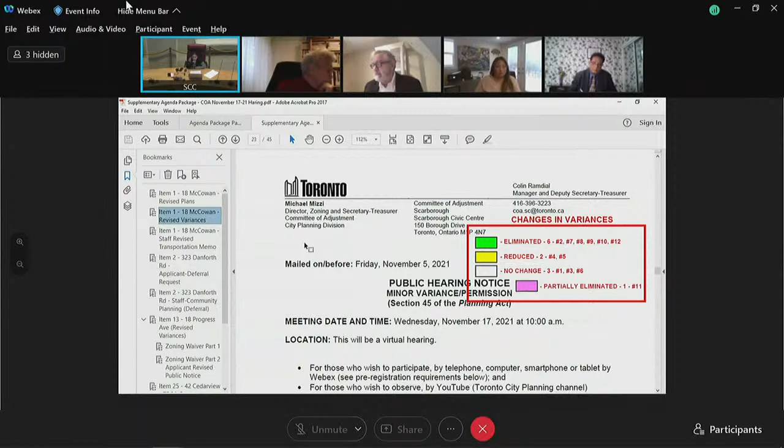Okay, so the revised notice, which shows the changes or elimination or modifications to the variances. So variance number 1 remains the same, no changes being proposed. For variance number 2, the setback from the front lot line abutting McCowan, that particular variance is being eliminated.

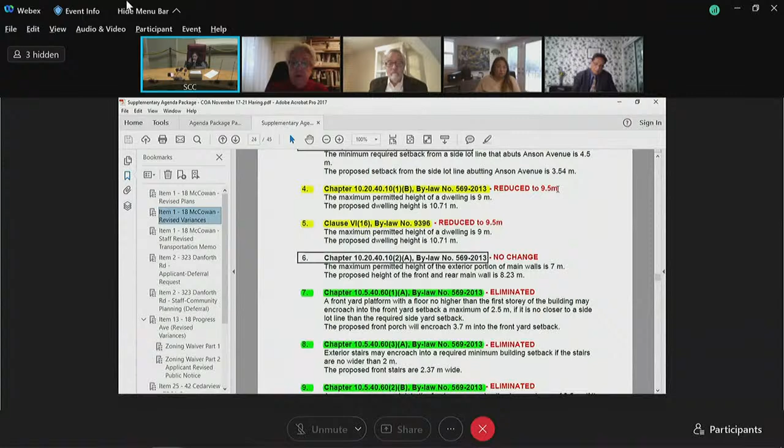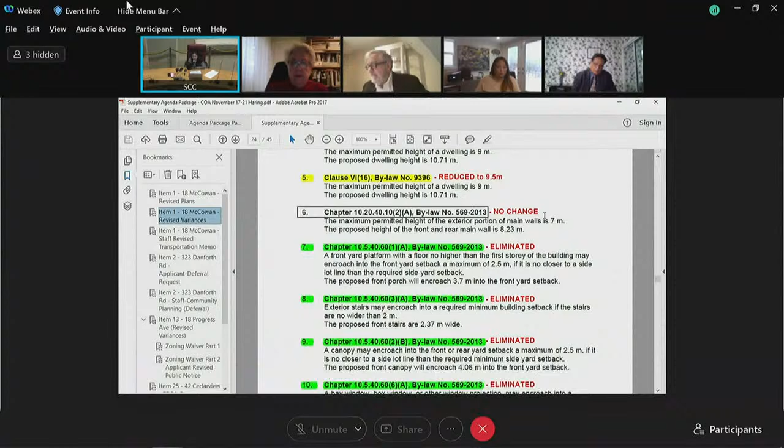Variance number 3 stays as is, no change. Variance number 4, the building height is being revised to 9.5 meters. Variance number 5, again, similar, because of the other bylaw, the height of the building is being revised to 9.5. Item 6 remains the same, no change.

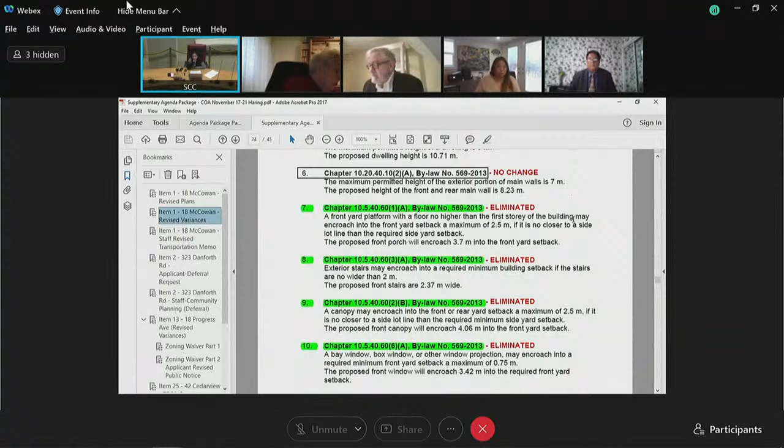Item number 7 is the front yard platform variance that is being eliminated. Variance number 8 for the building setback for the stairs that is being eliminated. Variance number 9 is being eliminated, that dealt with the canopy encroaching into the front or rear yard. That's eliminated. Variance number 10 is being eliminated, also had to do with the bay window box or other window projection encroachment.

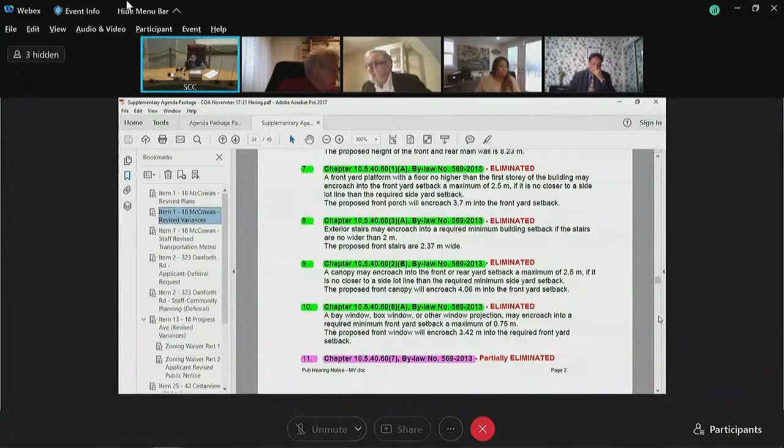And number 11 is partially eliminated, and the way I read it is that the eaves of a roof may encroach into a required minimum building setback, a maximum of 0.9 meters if they're no closer to a lot line than 0.3 meters. The proposed north eaves encroach 0.96 meters. That has not been changed, but the portion has been eliminated, which where it said the proposed east eaves encroach 3.23 meters. Variance number 12, as you can see on the screen, has been completely eliminated.

So that sort of gives a recap of all the variance, the modifications on the notice. Now, Member M, please go ahead.

Thank you, Madam Chair. So I'd like to thank the applicant for making these substantial changes, because to be honest with you, when I had read a lot of the presentation materials from the Cliffcrest community, I kind of agreed with some of their concerns in terms of the appropriate placement of the building and the overall scale and size of it. So through the elimination of the 6 variances, it definitely scales back the development.

It also allowed us the relocation of the driveway to be much further away from the intersection, which was what I understand transportation's main concern. What I also do like is that the building now is aligned with the adjacent building on McCowan Road. And so it is a very similar front yard setback to McCowan Road and maintains that consistency of the streetscape. So I do see that they have made a substantial effort to address the concerns while still being able to achieve their desires for a new home.

Katrien, may I request you to please bring up, if possible, the site plan that was revised and sent? So it's in the supplementary agenda, Member McCauley, the first tab on the supplementary agenda, the revised plan. It's up on the screen for your consideration.

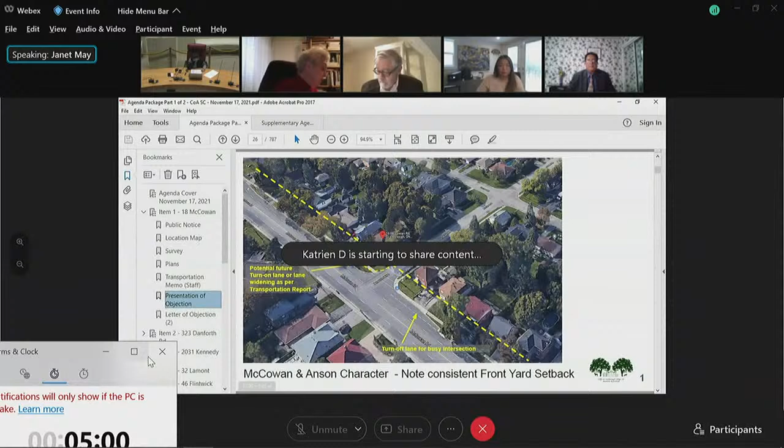My name is Janet May, and I am a director of the Cliffcrest Scarborough Village Southwest Residents Association and co-chair of the Planning and Development Committee. CSV SWRA is an incorporated not-for-profit association working to preserve the unique nature of our neighborhoods. We do not support the application to replace the modest dwelling located at 18 McCowan Road with a significantly larger house not in keeping with the character of the neighborhood.

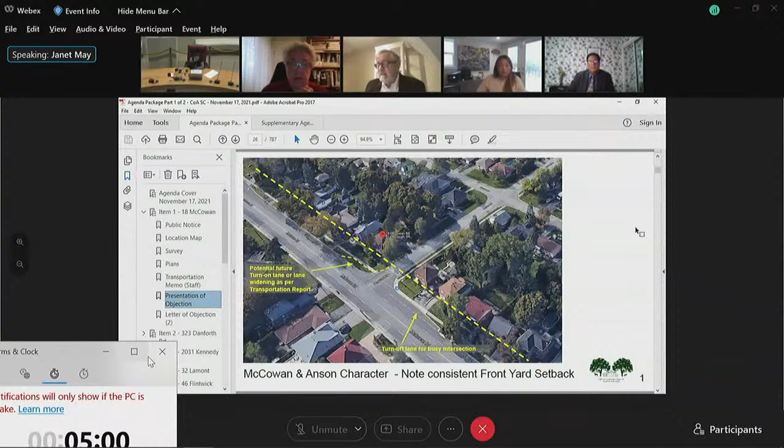I live on Harewood Avenue, a few blocks away from this proposed development. This presentation was submitted to the Committee of Adjustment in time for the deadline of November 9th, and the slides are in response to the original application. On November the 15th, the applicant submitted revisions to the application, and we were not permitted to revise our presentation, so we are working with an old one.

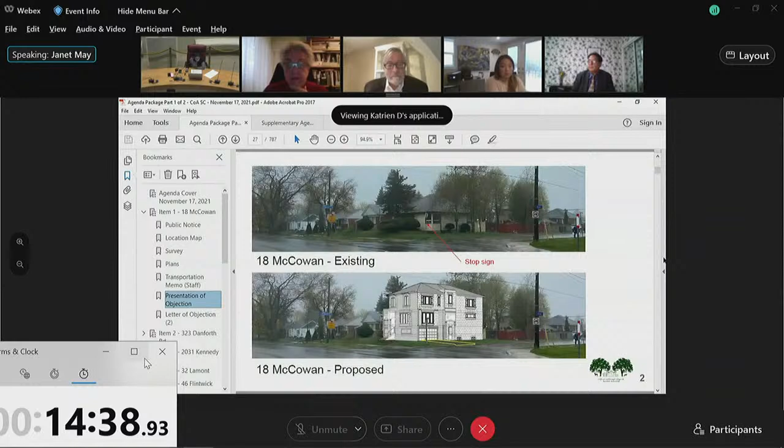Slide 2, please. The image you see here remains materially accurate except for the positioning on the site. In reviewing the revised application, no significant changes have been made to the oversized and inappropriate mass and scale of the building. We observe that the building has been moved back to the proper setback from McCowan Road, and the peaked roof has been cropped.

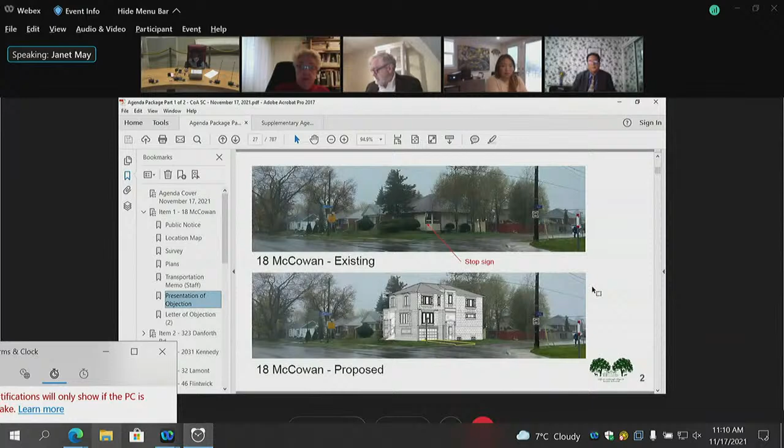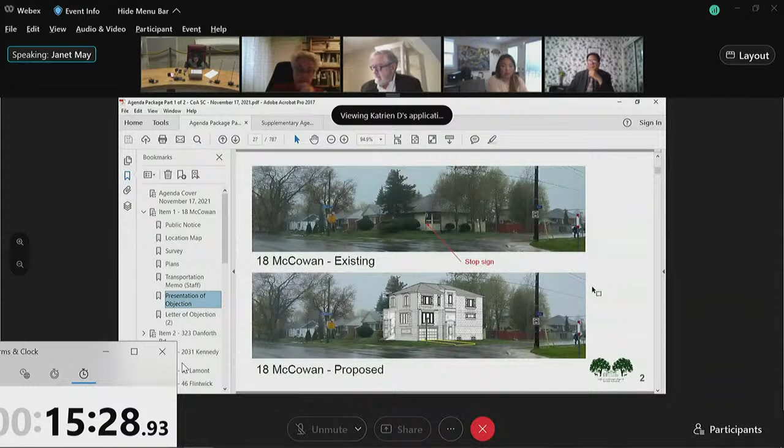But the most egregious variances remain, including the 25% increase in floor area and the additional 1.23 meters in wall height. Minor variances must maintain the intent and purpose of the official plan, whose policies ensure that new development in a neighborhood respects the existing physical character of that neighborhood. The existing physical characteristic of this neighborhood is 1-story and 1.5-story houses or victory homes, not the examples cited by the applicant in her presentation. The excessively large houses are not supported by the majority of people who live in the more modest-sized homes, and approval of this application will increase the slippery slope towards overdevelopment of our lots.

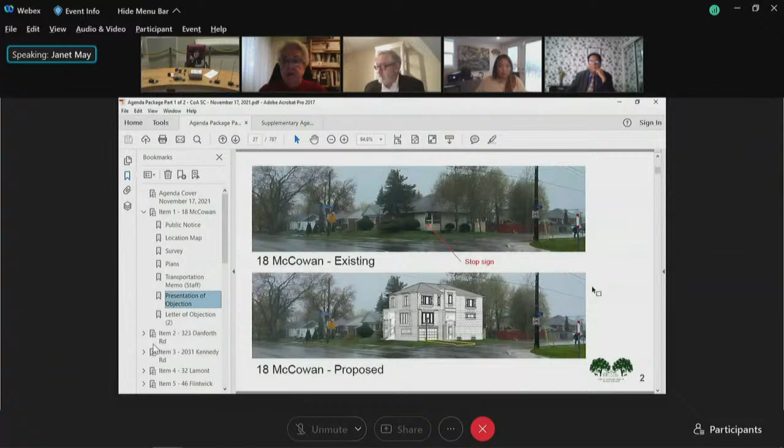Slide 3, please. The proposed development that will replace the traditional bungalow is described as a 2-story house, but has the appearance of a 3-story. See the floor plan for the living area above the garage. According to Chapter 10 of Bylaw 569-2013, the building may have no more than 2 stories. This application, therefore, does not maintain the general intent and purpose of the zoning bylaw.

As a local resident, I am still concerned about the proximity of the driveway to the intersection. It is still very close to that stop sign, and I believe that the house should be redesigned to move the garage to the west part of the house, away from the east part and the stop sign. I think that pedestrian safety needs to be considered. This intersection is a gateway to this section of Cliffcrest.

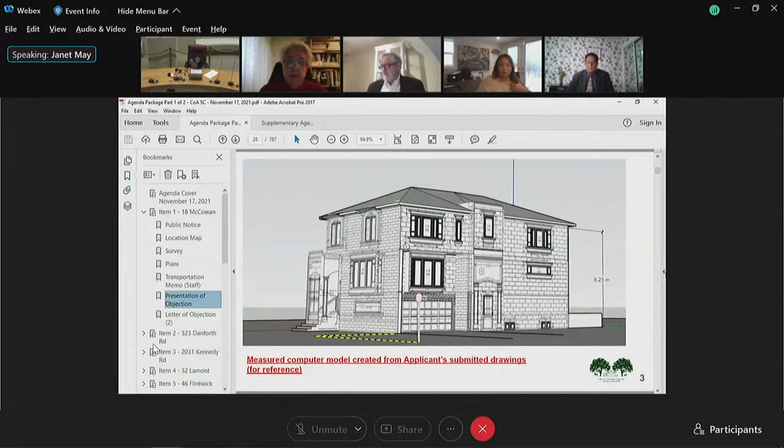Approval of the requested variances will result in a new dwelling that is significantly larger and not in character with the existing homes. The requested variances are not minor in nature and will have a negative impact on the people who live in the existing homes around 18 McCowan Road. Because of this, the development is not desirable for the appropriate development of the land. The 4 tests set out in Section 45(1) of the Planning Act are not satisfied. Therefore, we request that the Committee of Adjustment refuse the requested variances.

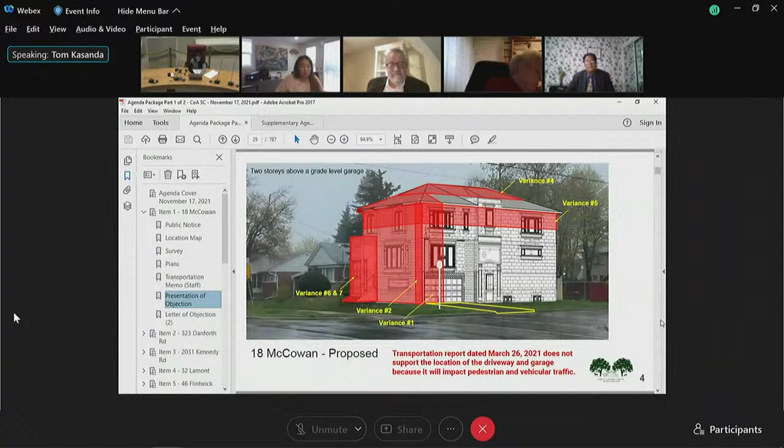The diagram you see above was prepared to show the setback variance, but the reality is the red still materially represents the impact of the remaining request for variances. In fact, the red in this diagram is understated. The red area to the left originally represented the front setback, but if you doubled that volume of red, it would also represent the 25% increase in the size of the proposed massing of the building due to the floor space index variance request. The horizontal band under the eave represents the impact of the wall height variance, which also has not changed. It is clear that the remaining variances are still not minor.

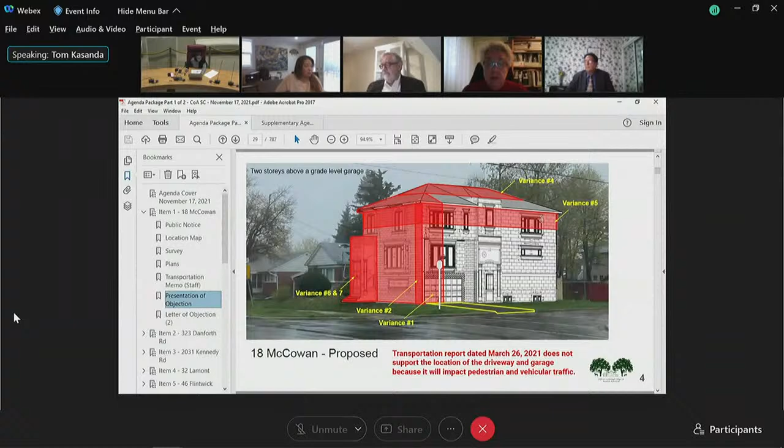Slide 5, please. Although the front yard setback and other 4 variances, all associated with the unimaginable positioning of this home, have been removed, this slide shows what was originally applied for.

I cannot speculate as to whether the applicant seriously wanted to move the house this close to the road, or if this variance was planned to be disregarded to create the appearance of compromise with the neighbors. But regardless, this is irrelevant. Compromise is not part of the 4 tests.

If the applicant had proposed 40 variances and eliminated all but 1, we understand the committee's responsibility is to evaluate whether that 1 remaining variance meets the 4 tests. In the revised application, the remaining variances do not. Let's take a closer look.

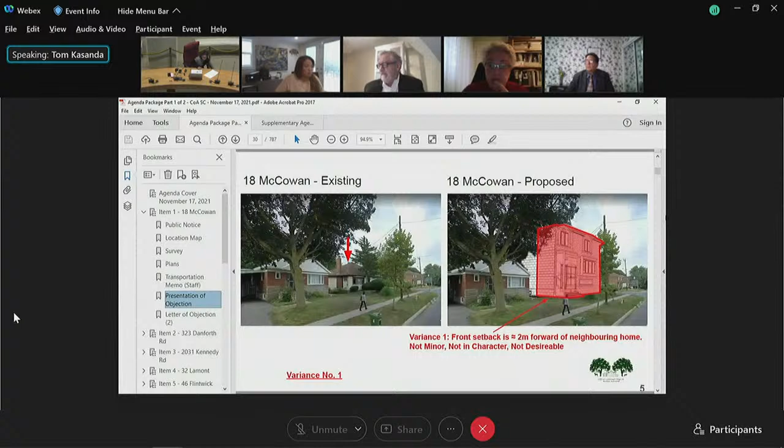Can we skip to slide 7, the floor plan? With respect to the FSI, this home is 25% larger than permitted for its lot size. That red area is on every floor. It is not possible to consider this variance minor.

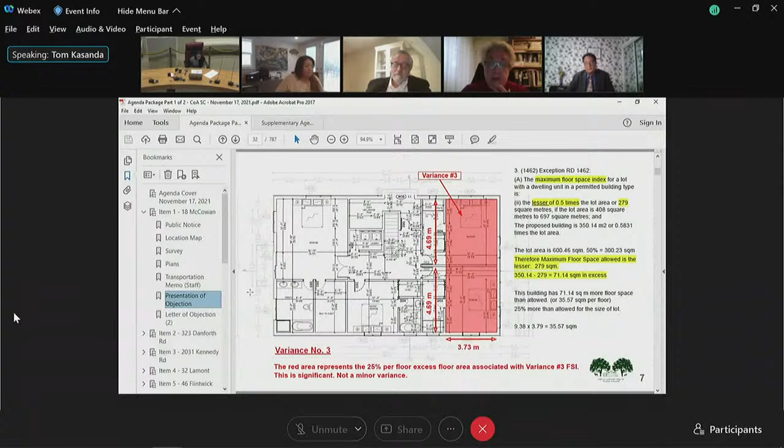This one slide disqualifies the application for approval, but there is more. Slide 8, please. Because of the last minute change by the applicant, we're not allowed to present a revised diagram. However, one was submitted to the COA. You'll have to imagine that a bit of the peak roof has been removed, but the 1.23 meter wall height variance and 1 meter side setback variance remain the same.

There is a lot of red, and proportionally, you can see it's not minor. The applicant may claim that the height is only a 0.5 meter increase, but in actuality, the impact of that variance on the mass of the house is much greater due to a clever loophole.

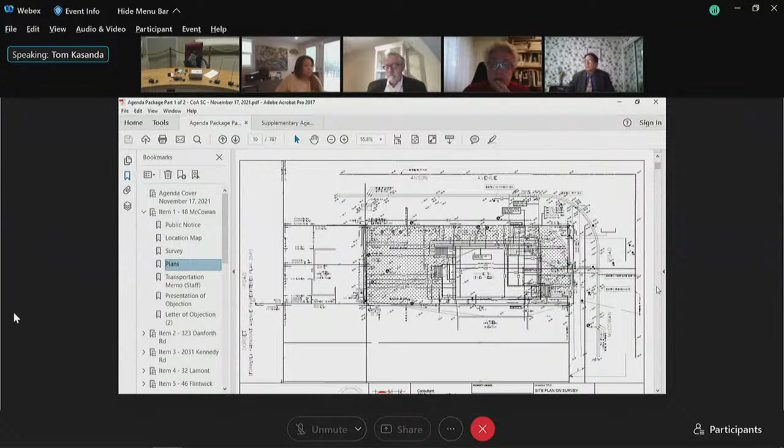Can we go to page 9 of the submitted plans, the roof plan? This roof is not considered a flat roof because less than 50% of the roof is flat. But this only exists with the inclusion of the requested height variance.

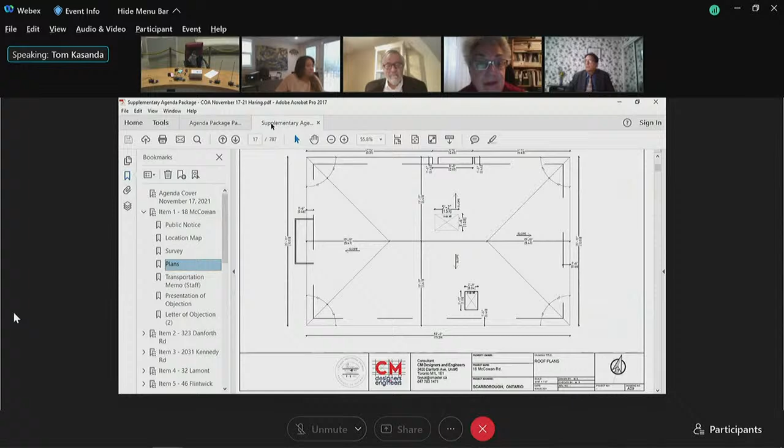Slide 9, the roof. And what you'll see if you just scroll down, that's the roof plan. This is the wrong plan. This is the original plan, unfortunately. So let's just carry on and go to, this is the wrong set of plans. That's the original set of plans that doesn't show the flat roof. Oh, no, it's not the resubmitted plans.

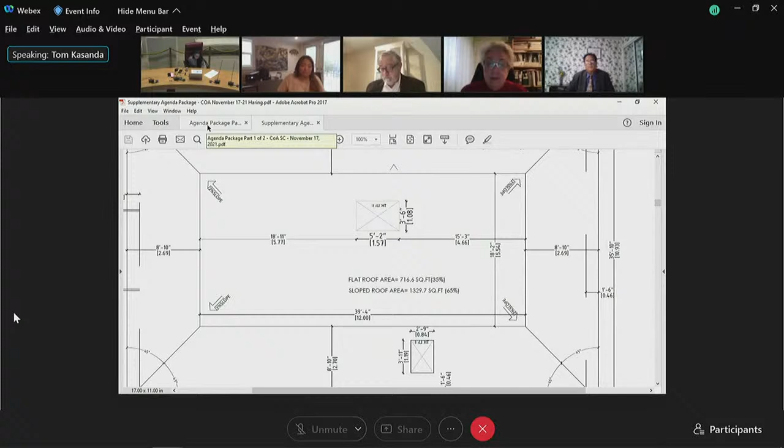In any case, let's return to slide 8 of the community presentation. So without the 0.5 meter height variance, the roof would be categorized as a flat roof. Flat roofs are restricted to 7.2 meters in height because they are more massive by nature. The application attempts to get around this bylaw and add 2 additional meters in height to a flat roof design.

Because in fact, this is a mansard roof where they've added a peak to show a very high variance and then drop it down. But everything above the flat roof height dotted line shown here is the implication of the requested height variance, creating a building that is not in character with the neighborhood and not desirable for this particular corner lot.

It does not meet the 4 tests, and we ask the committee to protect the neighborhood from this overdevelopment of this site and refuse the application.

And it's very important to understand how this small variance actually, everything you see there in green, that's the build envelope of the bylaw. Everything outside that green area is the impact of the current variances. And again, you can see it's not just a few inches or a foot. There's an incredible amount of extra volume created by these variances.

And as Member M said, the original proposal was a concern in relation to its size. And that size has not changed.

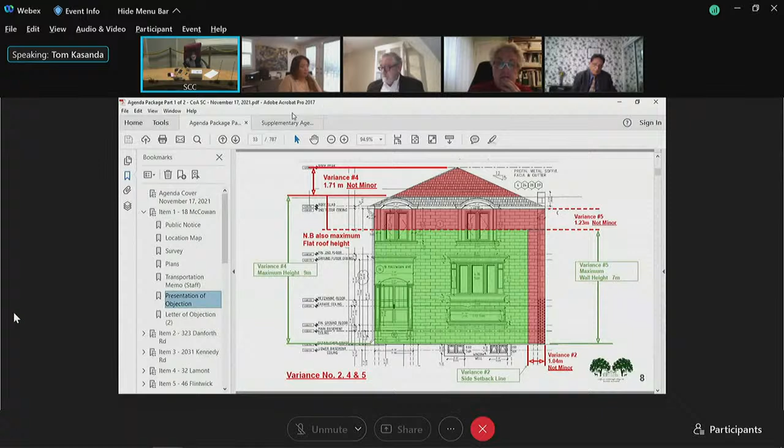Just wanted to clarify, in case there is some confusion. I did have concern with the original application, as both Tom and Janet had alluded to. But the scale is more than just the floor space. For me, I was pleased with the reduction in height. My main concern beyond the scale was the placement of the house, in terms of its effect on the streetscape, as well as the safety of the driveway placement. That being said, I don't have the same concerns as I did with the original application, so I don't want my words to get skewed.

I do feel that they have made an effort to scale back the size of this dwelling with the height reduction on its own and the elimination of 6 variances. I do appreciate that the floor space is larger than permitted by bylaw, but we've approved many floor space indexes around this amount in this area. So my concern wasn't so much with the FSI, it was with the height and the building placement, which they have addressed for me. Just wanted to clarify my words.

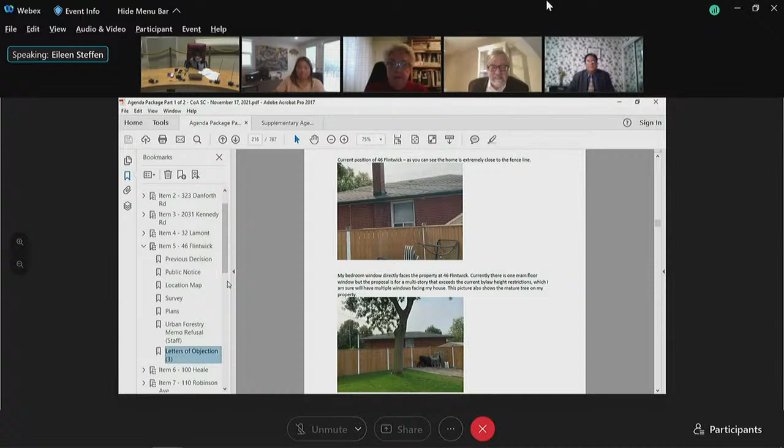Okay. So if you could refer to the pictures in front of you that I submitted, it all has to do with this irregular lot and the positioning of this house, and the fact that my aunt really feels this is fundamentally going to rob her of her sunlight and invade her privacy. Okay, no, I get it, I understand that. Sorry, my apologies, first of all.

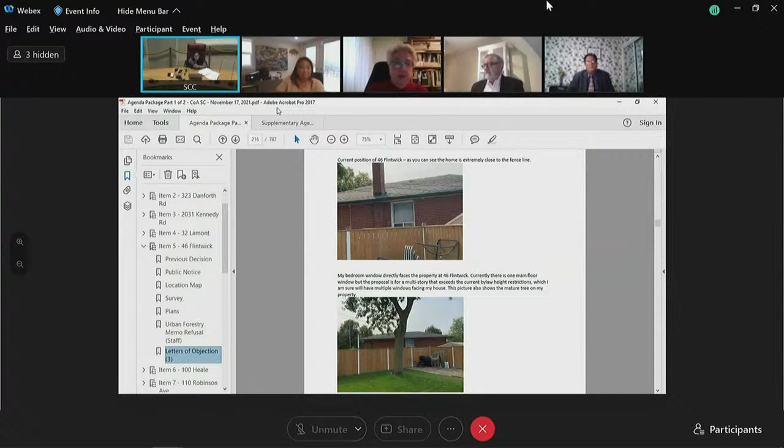I probably had a different notice put up. So for the record, I want to confirm - yes, Member McCauley, I will come to you, I've seen your hand. Just for the record, I want to say that there are three variances for this application, 46 Flintwick, and all three are related to the height. The first one being from 9 to 9.86, the second from the older bylaw going from 9 to 9.92, and the third is the height of the exterior portion, the main walls.

Just to clarify to Eileen and her niece - I'm sorry, I didn't catch your name.

So want to clarify that the positioning of the house itself meets the bylaw. There are no reductions, we understand that. So there's no, by law, as of right, the zoning bylaw permits the house to be located, the proposal meets the side yard setbacks and whatever the setbacks are required. So the zoning bylaw, as of right, permits that type of envelope or location of the building on the property.

Sorry, we totally appreciate that the current structure and the positioning of it is within the bylaws. Our objection is that if they're giving a variance, the positioning of the house needs to be taken into account, given that it is kind of kissing up to the limits of where houses are, the closeness of the property line. And while it's currently within the structure, I know they'll say an extra 3 feet above the bylaw sounds insignificant, but when you look at the pictures, imagine a second story dwelling there now where a current bungalow exists, and then to boot, one that is also exceeding bylaw by 3 feet.

Okay, thank you, Ryan. And Katrien is bringing up your presentation. For the record, we did receive a copy of this presentation in our agenda. So Ryan, you have 5 minutes and your time starts now. Great, so again, my name is Ryan Doherty.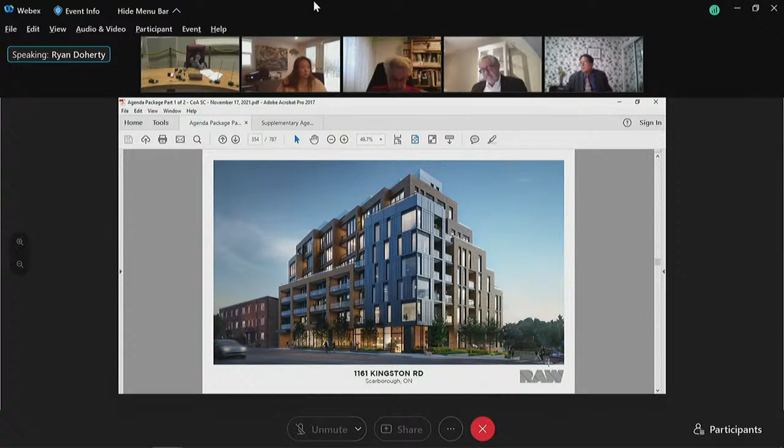I'm a planner at Bousfields, and I am the agent to the application. The proposal consists of an 8-story building containing retail and residential uses. The building will provide a 4-story street wall with new tree planting along Kingston Road and Courcelette. At 8 stories, the proposal is in keeping with the existing mid-rise context in the Birchcliff area, where buildings of up to 10 stories have recently been developed.

The proposal is also in keeping with the site's avenues and mixed-use areas designation. Those are areas in which the official plan notes that much of the city's growth is to occur. Through our ongoing site plan application, we have had several discussions with city planning over the better part of the past 2 years. The results of these discussions were many progressive iterations to the design of the building to mitigate overall built form impacts, particularly on the Kingston Road right-of-way. As a result, we now have a mostly positive report from planning and a positive report from transportation services.

I also wanted to note that we had been involved with the local community through a community consultation meeting that was held this past June with the local councillor as well.

I just wanted to touch on Urban Forestry's recommendations as well. So the issue here is primarily regarding on-site soil volumes. Soil volume is a common issue that arises on most urban infill projects, given that the requirements are very challenging to meet on small sites. We've done the best that is feasible in this location, given that our site has some unique dimensions and grading, and considering that the planting along Courcelette does not count towards our on-site soil volume.

We also have confirmation from our landscape architect that the proposed tree planting along Kingston and Courcelette will have sufficient overhead clearance and soil volume to grow. And so finally, before I hand it off to Roland, I'd also like to add that the proposal will represent a unique and eco-conscious mid-rise addition to Kingston Road and is intended to achieve a LEED Platinum certification and TGS Tier 2. Next slide, please.

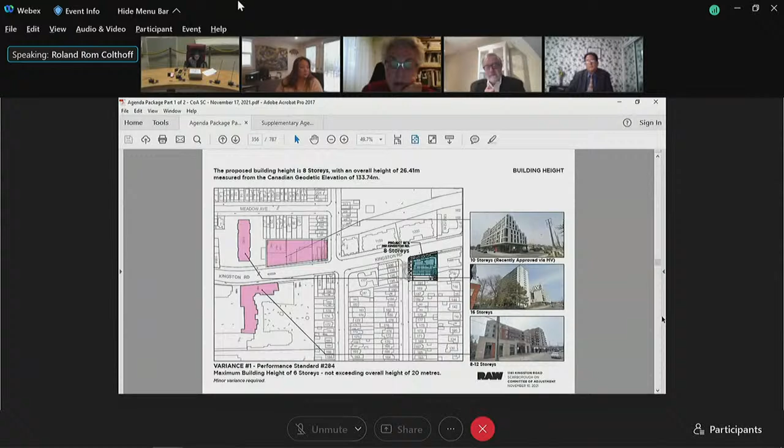A lot of the variances go to the configuration of the lot and the geometry, and the fact that it slopes one full level as you proceed to the south. This speaks to the context in which the building is happening. The densities in the area are in keeping with what we're asking for here. Similarly, the height—there's a 10-story building just down the street—the density and heights are in keeping with what's in the area.

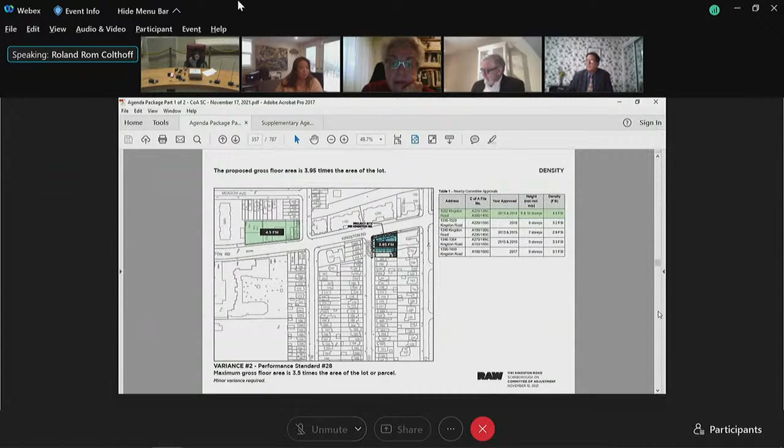With regard to the front yard setback, we are providing 4.8 meters from the curb to the building face, as called for in the typical street guidelines in the city. We have the 2.1 meter pedestrian clearway. We have a letter from our landscape architect, which we weren't able to submit to the committee in time, confirming that the canopy of the tree will be unaffected by this building and by the 2 meter setback of the floors above.

We're proposing not to have a setback on the Courcelette side because we are a mid-rise building fronting one of the major avenues within the city, so it's appropriate to have a zero lot line condition. It's worth noting that Courcelette is quite a broad boulevard and does provide adequate landscaping along the street and adequate separation and buffer from the building to the curb.

The angular plane from the rear, taken from the bylaw as a result of the slope of the site to the south by approximately 3 meters, does substantively cut into the road. It's a very small site and we're proposing a relatively modest building. It does generally comply with the mid-rise guidelines, which are citywide across the city of Toronto. You can see we're quite close to the angular plane at the rear, just some small projections. These have all been gone through with city staff to try and arrive at a solution they're comfortable with, and we understand that in terms of the rear of the building, they are in congruence with that.

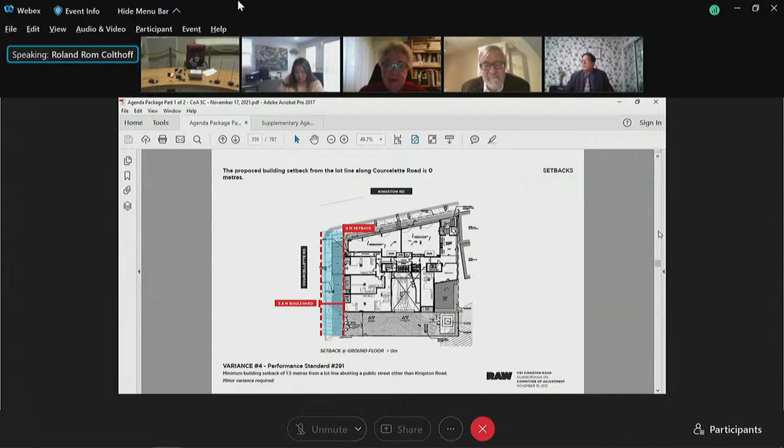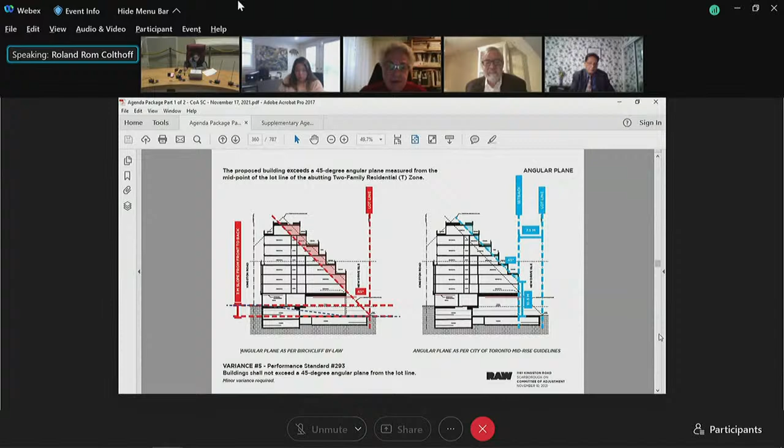If we could go back to the slide before this for a moment—back to slide number 8, please. Okay, so we set back the building above the 14 meters as required. This is the one that talks about the front yard.

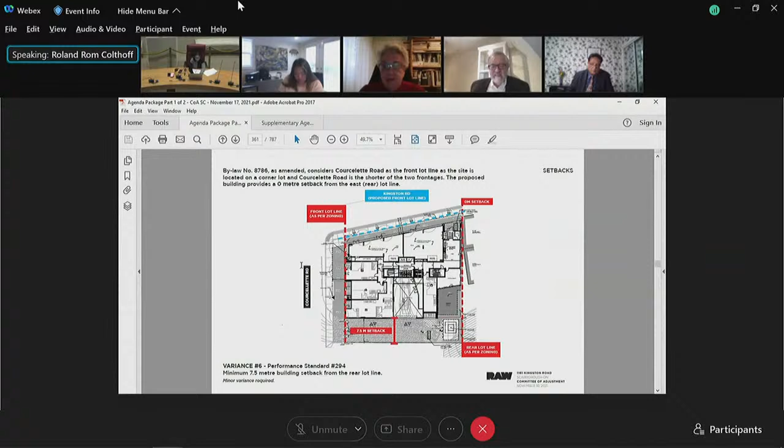Interestingly, the zoning bylaw counts Courcelette as the front of the site, which is obviously incorrect. Kingston Road is the major street front, and all the setbacks should be measured from that. So a number of these variances fall out of that simple circumstance.

The bylaw requires a setback above 14 meters to provide the appropriate character and height to the building. We are providing that setback on average because of the geometry of the site. You can see on the right-hand image that the building terrace has a sort of serrated edge in plan. On average we do meet the 1.5 meter setback, but we do have projections into it.

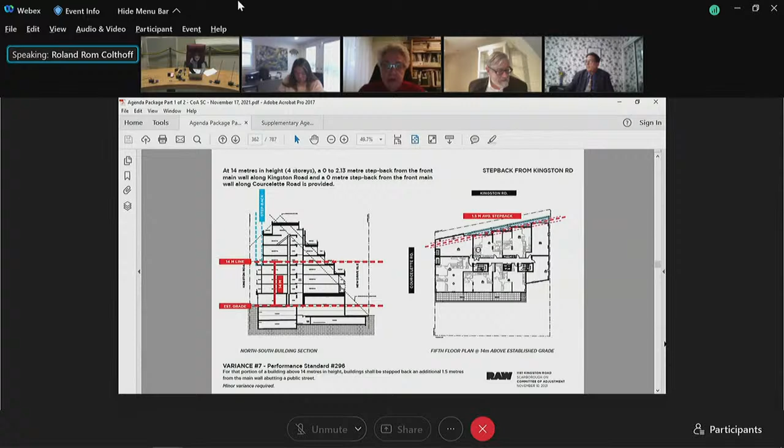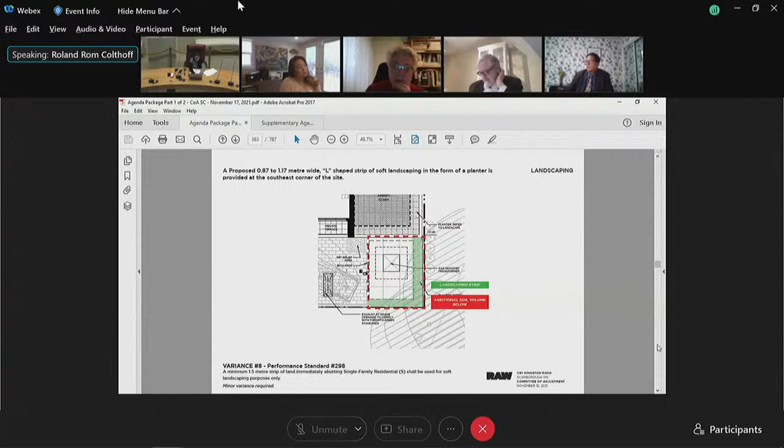This speaks to the landscaping at the south of the property. It is slightly narrower than the 1.5 or 2 meters requested by the bylaw. However, we have spoken with a landscape architect, and we will have appropriate buffering for the transformer vault in that location, a pad-mounted transformer, and for the building in that location.

We are providing the appropriate amount of outdoor amenity space and green space in the building. We have an area at grade and on the upper floor of the building for use and enjoyment of the residents of the building.

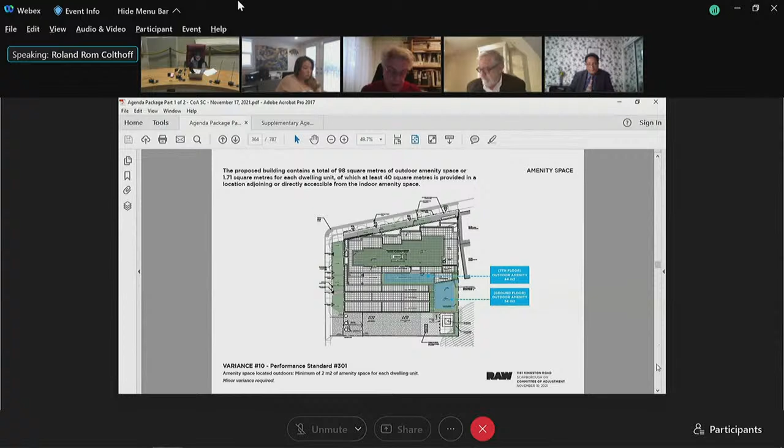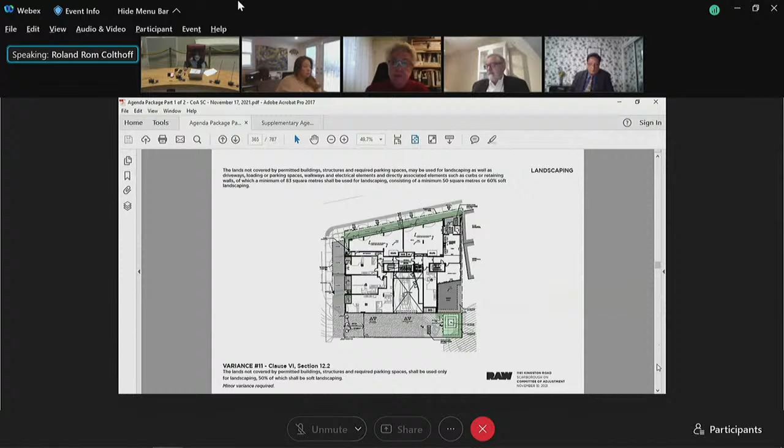We are providing the appropriate amount of soft landscape cover we feel on the design. We have soft landscaping along Kingston Road, and mature street trees can grow in that. I also mentioned the area at the southeast corner by the transformer before. Next slide.

Because of the slope of the site, we are asking for an amenity space in the so-called basement of the building. Because of the slope of the site, it's actually at grade at that point. So again, this is a problem with the bylaw definition and how it treats the geography of the site. Next slide. Okay, 5 minutes is up.

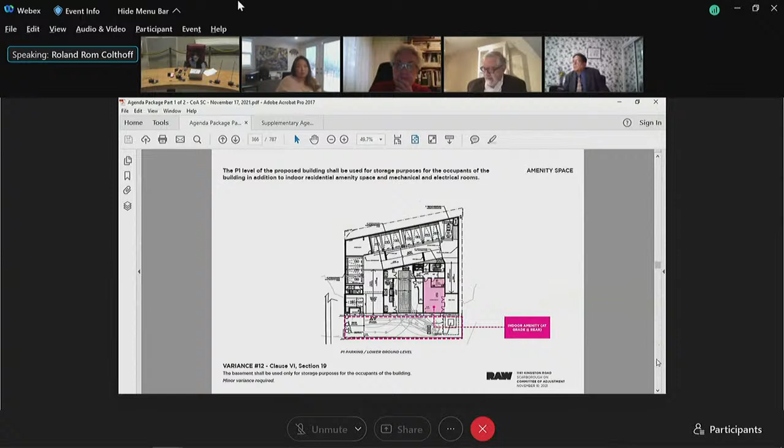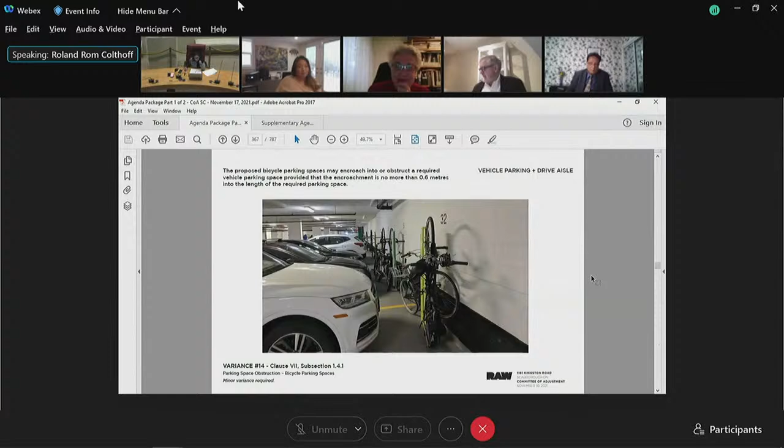Just on transportation, we have a letter of support from transportation for all of the variances requested with regard to drive aisle, parking stall size, and the arrangement of the bicycle parking. I'd be happy to take any questions.

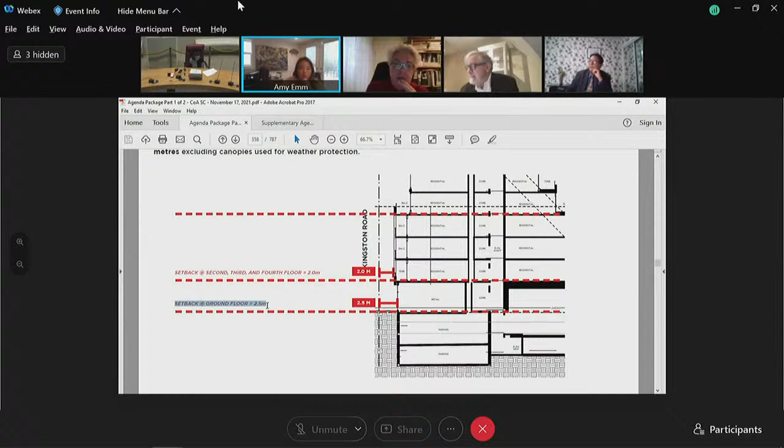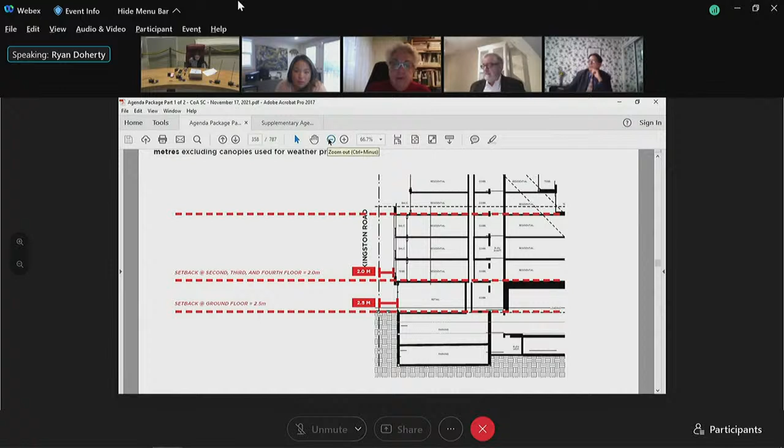Are you agreeable to their request for variance number 8 that basically ties it to the site plan showing down at the southeast corner that you will extend it to a 1.5 meter landscape buffer? I'll have to defer to Roland on that, he has more background on the transformer. From what I understand, we are limited due to the truck turning radius required by transportation services, and the fact that the transformer is pad mounted, so we're pretty tight in the rear yard. But I'll defer to Roland on that question.

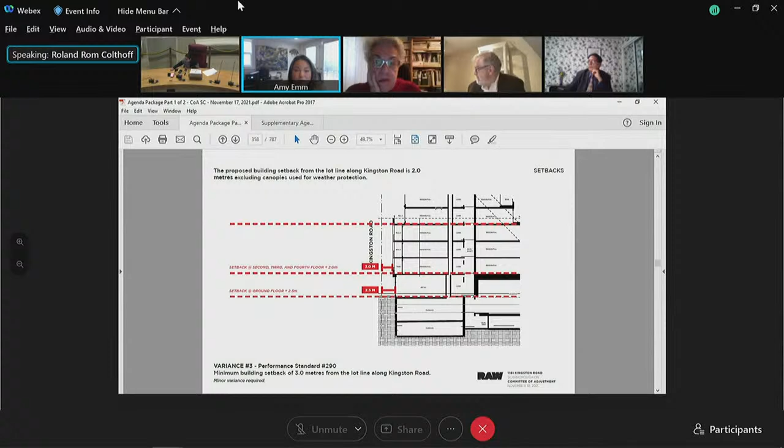Looking at— sorry, Ryan, shall I answer that, or do you want to? No, just wait, because now that we've got this— okay, I'm seeing what you're saying. Can you zoom in a little bit, Katrine, please? The way it was, was fine.

So I'm seeing that the first floor, which is the retail, has that 2.5 meters, and I think staff wanted at least 2.1, and on the floors above that there is that slight projection of 0.5 meters. So that satisfies me in terms of the intent. I guess the intent was that they wanted to protect an adequate public realm and needed 2.1 meters separated in order to do that. I mean, people are not going to be walking up on the second and third floor on the sidewalk.

So until we have hoverboards, I don't see that as being a concern. So I'm satisfied with this. We can move on to variance number 8 now.

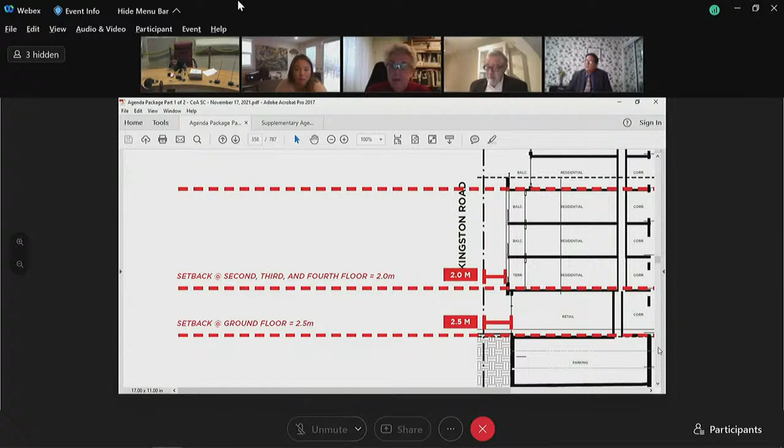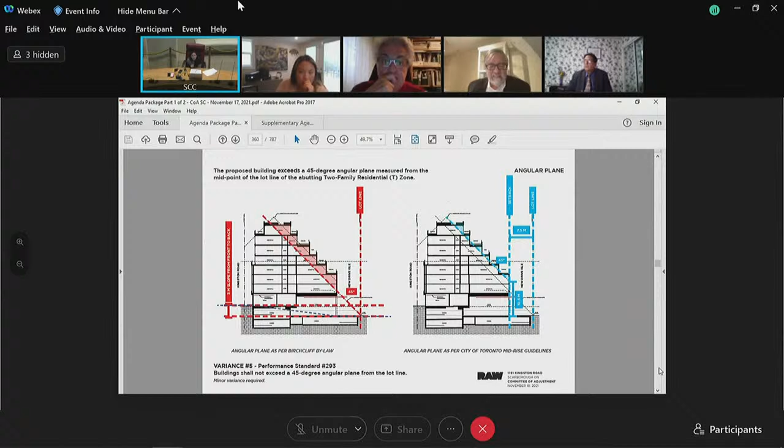So I just got some additional clarification. The reason why it has to be taller and higher is because the clearance for trees, not just the first story, it's the trees, right? That the clearance is being requested for. This is staff just giving some background on the application.

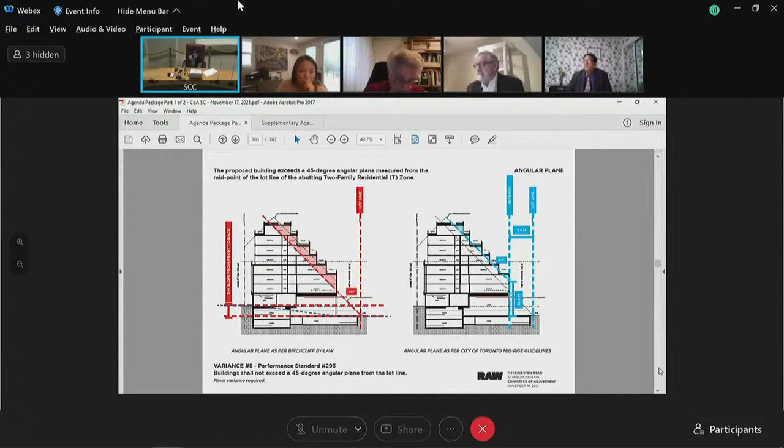As I said, we have a letter from our landscape architect that we're happy to submit in the next few days. We just got it yesterday to clarify that they're comfortable that the canopy of these trees will be unaffected by the setback proposed here. It's worth noting that our neighbor to the east has a 0 lot line setback, so we're already significantly freer than what's around us. Go to slide 10.

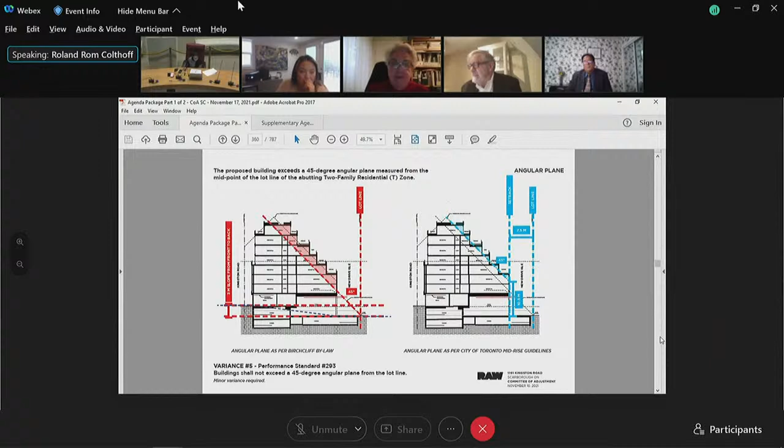You can see the southeast corner and the landscape proposed there. We're happy to work through with staff the quality of the landscape buffer provided there. Because it's a pad mount transformer, there is the at-grade condition below it, so we will be able to provide fully mature landscape in and around this transformer at the southeast end of the site.

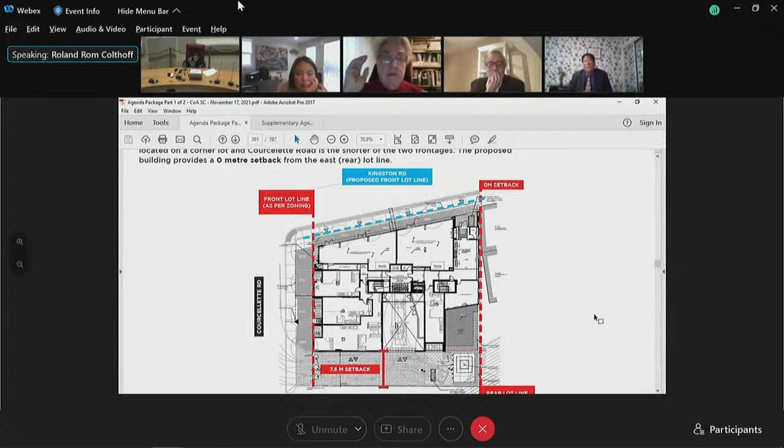The fact that it's 1.2 versus 1.5 meters, we don't feel should be treated as material, and we're just worried that if we shift the transformer further westward, we're going to run into trouble with the turning path and maneuverability of the waste vehicle from City of Toronto.

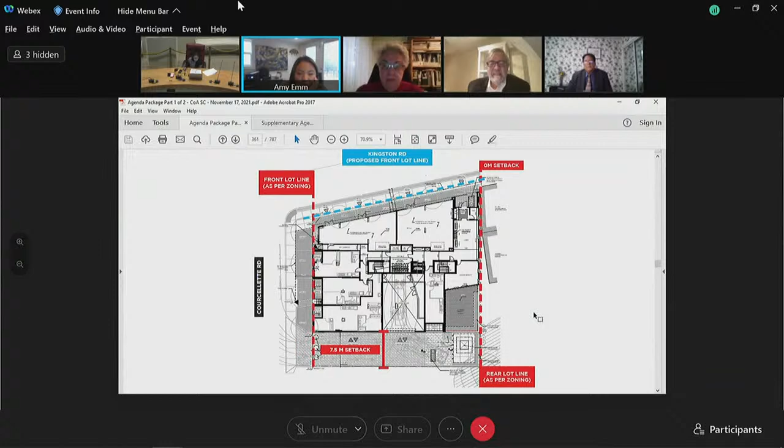Sorry, I'm not seeing the landscape buffer on this image. It's slide 10, please, two more down, another one. That's it. Thank you. There it is. So you can see the swept path of the truck is just at the left-hand side of that image.

So wait, the part that they want enlarged is the south-facing part, right? Well, again, the transformer has a certain buffer area around it that you cannot change, and if the new rules of City of Toronto, Toronto Hydro, require that you cannot build an underground garage below the pad mount transformer. So if we push this transformer further north or west, we will lose parking stalls or a drive aisle in the building. It's a very tight site. We're trying to fit all this technology into it in the appropriate manner, but we really can't push the transformer further north, particularly because we'll lose the drive aisle, or west.

We'll push the truck. My question is this is not demarcated, right? So I can't exactly see where it's at 1.5 and where it's not. And from the comments I see from city planning, they're actually saying tie it to the plans, because the bottom southeast corner does maintain that 1.5 meter strip. Is it not 1.5 meters?

So the architectural plans, the ground floor plan has the dimensions on it. We just highlighted this and cleaned it up for the sake of the presentation. But where the landscape buffer is going north-south, the dimension is 1.17 meters. And where it is going east-west, it is 0.87 meters. And city planning are asking that both of those dimensions be increased to 1.5 meters.

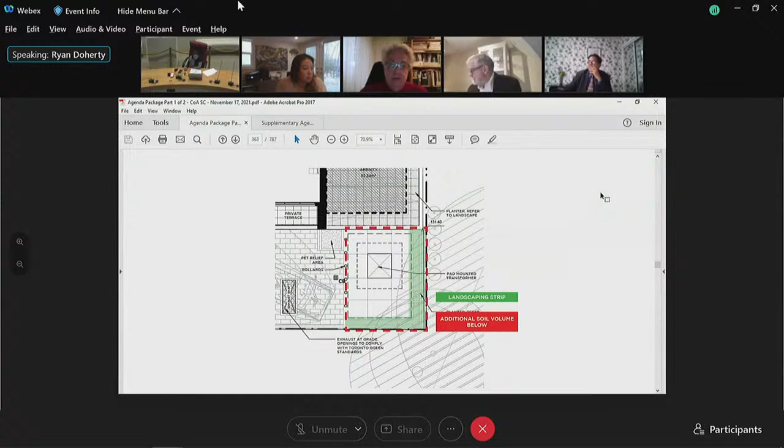Okay, and if that happens, then you're going to have further reduced parking spaces, which could be in conflict with transportation staff's report, because right now they're okay with variances 13, 14, 15, and 16 because they understand the limitations of the site. But then you would be looking at further reductions, like how many further parking stalls would you lose as a result of relocating this transformer?

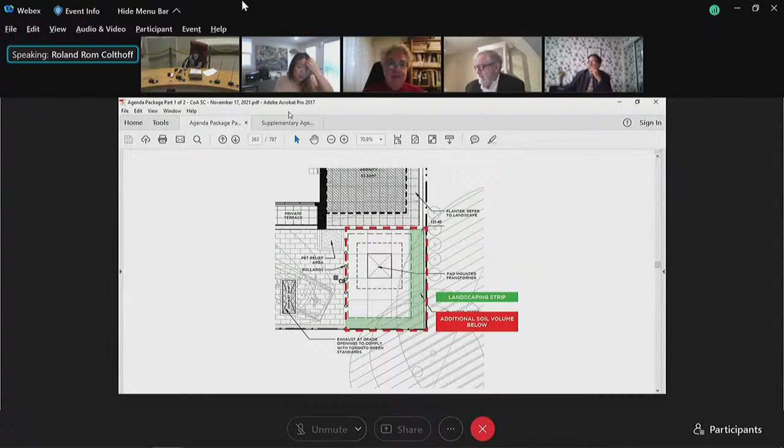Well, if we move it westward, we lose one space. If we move it northward, then we have to go back to the variance with regard to the drive aisle, because we'll have a deficient drive aisle getting cars down into the garage. I'd also like to note that it will impact the truck turning radius at grade as well.

Can I ask a process question? Go ahead. This is a little bit difficult because what I'm hearing here is that there are still issues that need to be worked out through the site plan process, and maybe we're not actually ready to hear these variances if there are still concerns from community planning. If you were to make changes to satisfy community planning, it could create problems from transportation, both on the parking side and the truck turning movements. I echo Member M's comments.

I was about to say the same, I was just asking where in the process you are with the site plan circulation right now. So with this minor variance submission, I believe it went in September. We also submitted our second site plan application.

I just want to reiterate for the committee that we have been discussing this application for the better part of 2 years with city planning to put together a built form that everybody is generally okay with. So there's already been a lot of progressive changes to this building.

I understand. Have comments been received back on your second submission? Not yet. So this is where I feel it's a little bit preemptive, because until you get comments back on your second site plan submission, we may be back towards additional variances since the design itself has not yet been finalized.